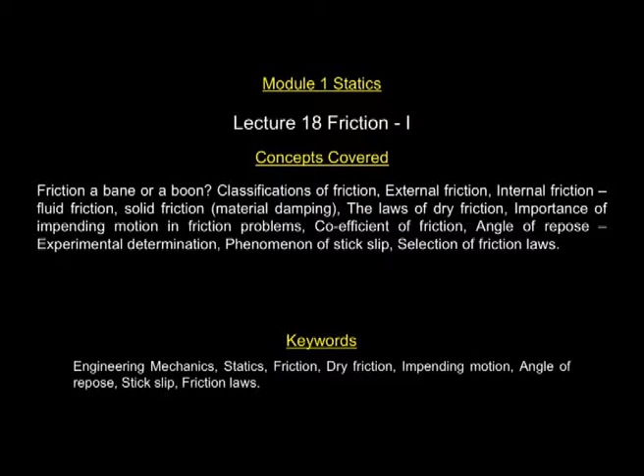Let us move on to our next chapter on friction. In common usage of the word, even in relationships, when we say there is friction, we use it in a negative connotation, not a positive one. But if you ask whether friction is a bane or a boon, you find friction is needed in certain applications.

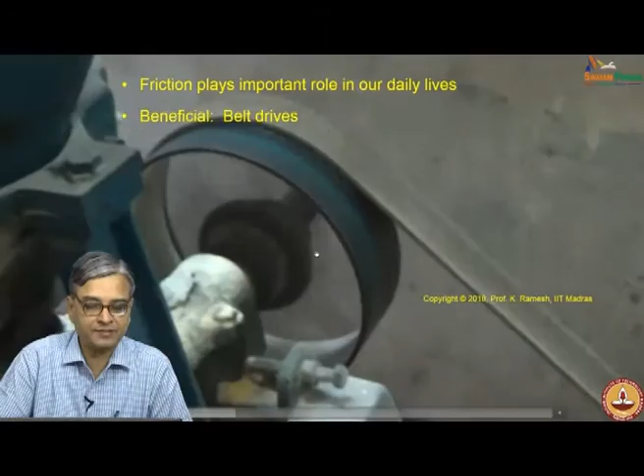And if you go to your simple atta chakki, this is driven by belt drives, and these belt drives employ friction. So, in such applications, friction is beneficial.

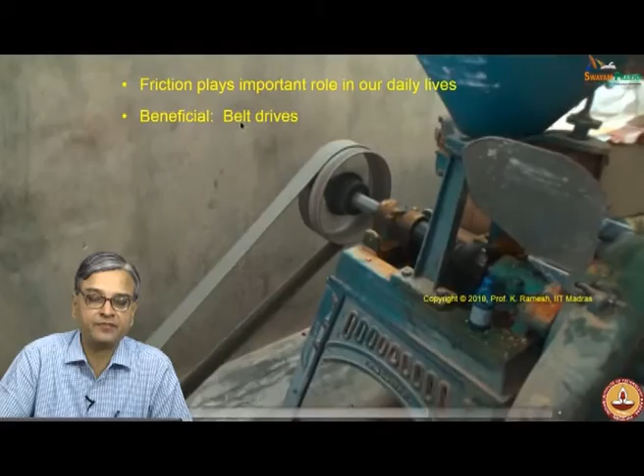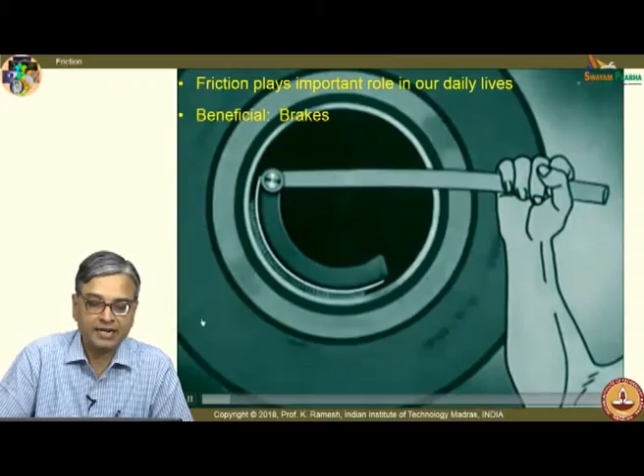Friction is also beneficial in another application that deals with the braking system. When you apply the brake, because of friction, the wheel comes to a stop. So, there are many applications where friction is needed for our own good.

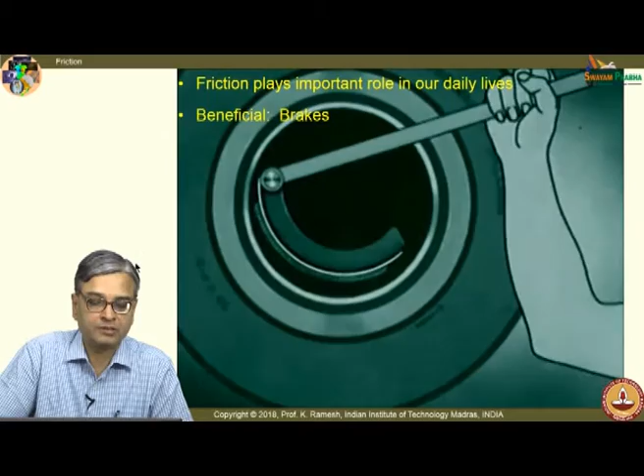There are also many other situations where friction is undesirable. Lots of money is spent on lubrication. This is the IC engine used in automobiles, and you have millions of automobiles. They all use oil to minimize the friction between the cylinder and the piston.

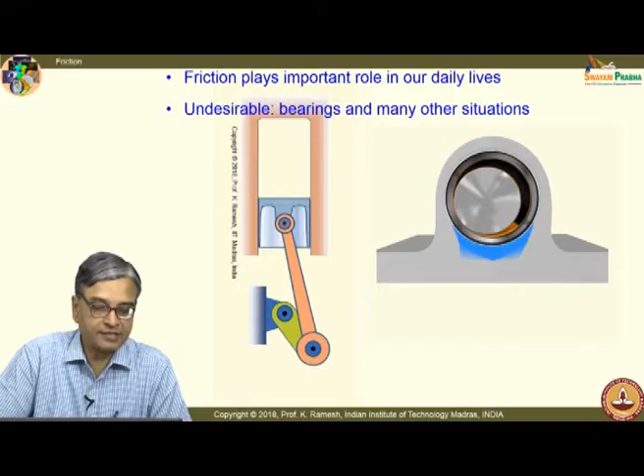You also have several applications of journal bearings, where oil separates metal to metal contact between the shaft and the bearing. If you go and see a machine in the workshop, you would see lots of oil used to lubricate the systems involved.

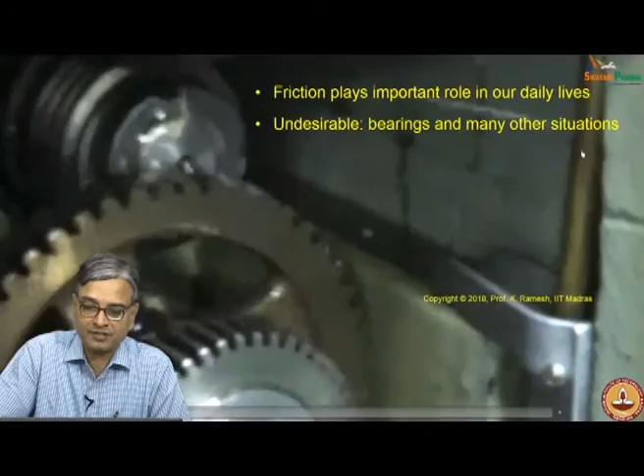Here you also have a system where oil is pumped like this, and you have a worm and worm wheel. That assembly is literally flooded with oil to remove the frictional effects.

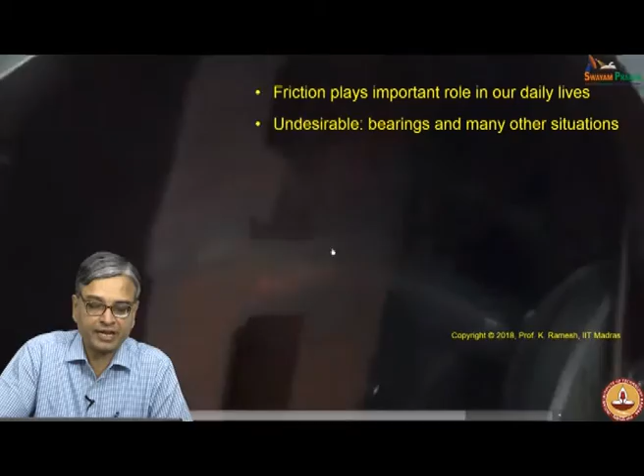This is one example. You also have another example, the quick return mechanism of a shaper. It is literally in oil, a pool of oil here. We will also have an occasion to solve this quick return mechanism when we see dynamics.

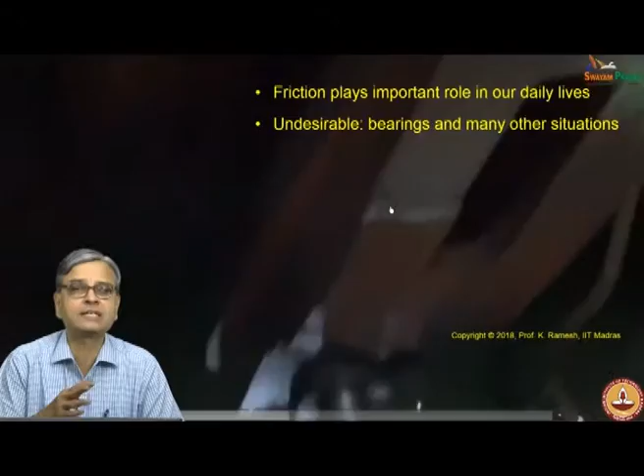So, in all these applications you find you need to minimize the effect of friction. You achieve this by having a medium of oil to solve your frictional issues.

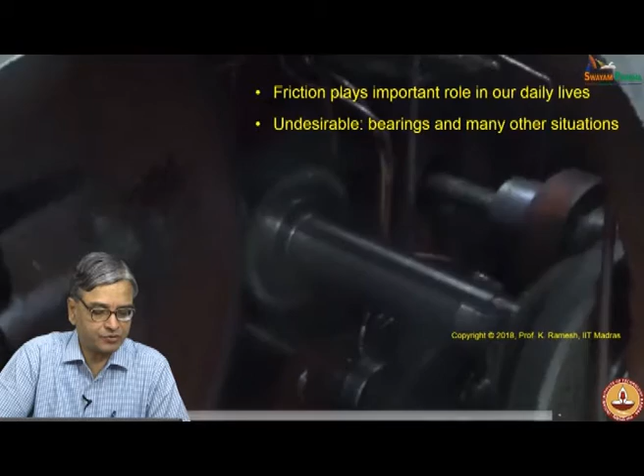We have also seen earlier when we studied support conditions, when I have a pin joint, it restrains translation in two directions, and you have two reactions, the force is unknown and the direction is unknown. So, you have essentially two unknowns.

We also saw frictionless thin bearings. Here again, the direction as well as the magnitude are not known, you have two unknowns.

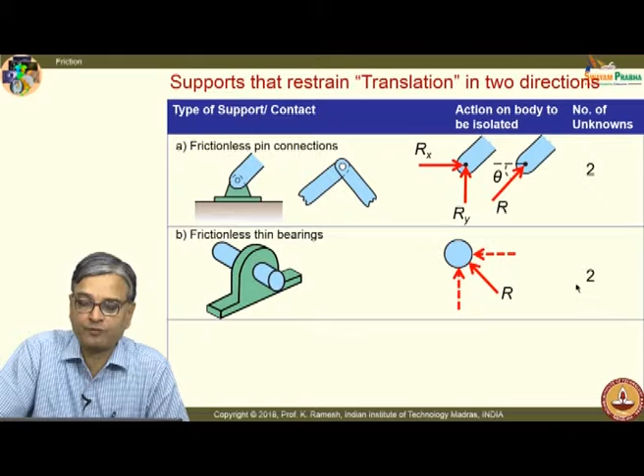Extending this, in the case of rough surfaces in contact, the rough surfaces are shown highly exaggerated. You have two forces, a normal force and a frictional force.

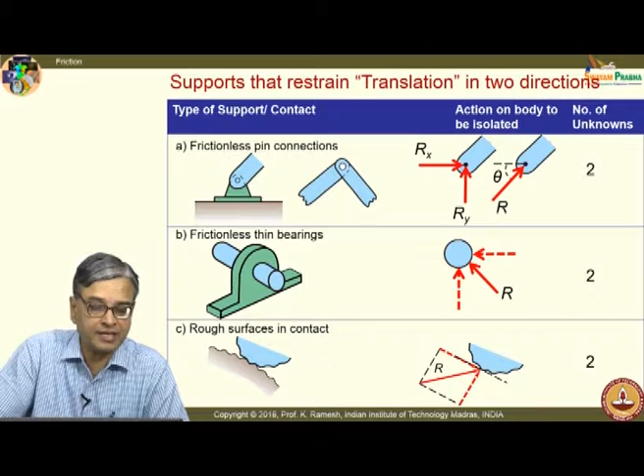In all problems dealing with friction, one of the challenges is to find out the actual direction of the frictional force. From the laws of dry friction, when the motion is impending, it is possible to write the frictional force from the equations of friction. In all other cases, you will have to determine these forces only based on the free body diagram of the component under consideration, which we will emphasize and see later also.

What are the classifications of friction? It can be broadly classified as external and internal. In external friction, I will have static friction, I will also have dynamic friction. And in internal friction, I have fluid friction as well as solid friction.

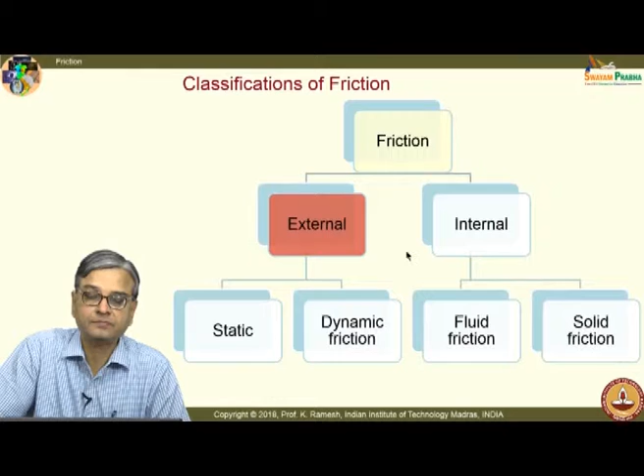What do you call external friction? The interaction between surfaces of two solid bodies in contact. This can be static friction or dynamic friction. In static friction, the surfaces are at rest, but there is a tendency for relative motion. Only when there is a tendency for relative motion do frictional forces come into play. Until then, frictional forces do not come into play.

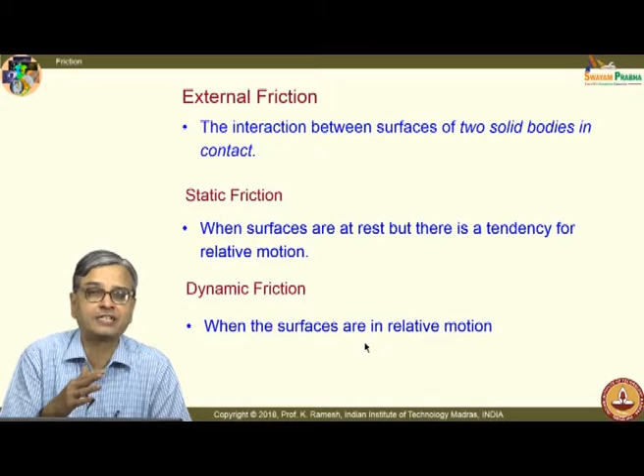And in dynamic friction, the surfaces are in relative motion. In earlier books, you would also find a term called kinetic friction. The current practice is to do away with kinetic friction and embody all that was discussed under the ambit of kinetic friction as dynamic friction. That is a new terminology that is accepted.

And before we get into the details of external friction, let us have some brief discussion on fluid friction as well as solid friction.

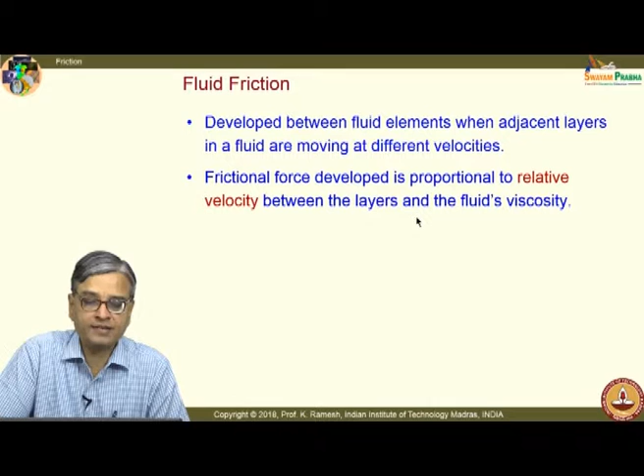This is developed between fluid elements when adjacent layers in a fluid are moving at different velocities. This is possible only when the metal to metal contact is completely separated by lubricating oil. What is interesting here is the frictional force developed is proportional to the relative velocity between the layers and the fluid's viscosity.

It is also interesting to note, in your physics course, you are already exposed to certain aspects of friction, and you might have heard that frictional force is proportional to the normal reaction. From Newton's second law, force is related to the acceleration. So in the case of dry friction, the frictional force is directly proportional to the acceleration. In the case of fluid friction, it is proportional to the relative velocity, and we would see later that in the case of solid friction, the frictional force is related to displacement.

This is very, very interesting. Fluid friction is useful in problems of flow through pipes, orifices, bodies immersed in fluids, lubricated surfaces, and so on. This is also called viscous friction.

Fluid friction appears as a frictional drag, which is seen in the design of automobiles, and India is also going in for a high speed train. If you look at the streamlined body contour of the engine, this is essentially done to minimize the frictional drag.

Also in the case of sports, if you look at cycling in the Olympics, the participants are competing with each other and can have an edge over the competitor if he or she wears appropriate clothing. The dress is designed based on frictional aspects, and if they reduce the frictional drag, they may gain an edge of the order of 0.01 seconds compared to the competitors.

Another interesting aspect is, in the case of vibration studies, you use damping as viscous damping, and this is also used in aerodynamics as frictional drag, and in vibration studies as viscous damping.

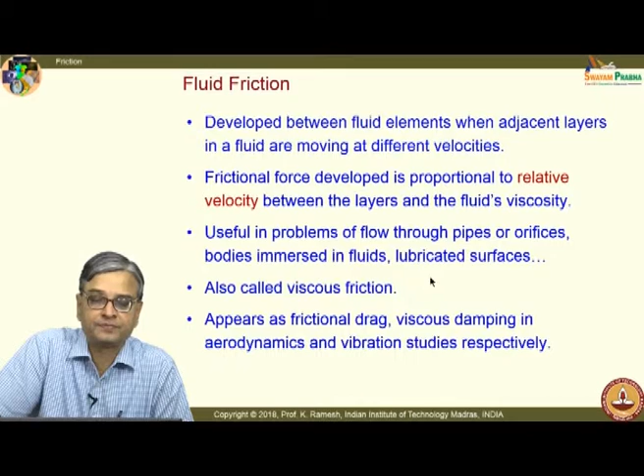This is what you see here in the vibration study. I have a spring and dashpot, and the dashpot has a viscous fluid, and you find the amplitudes reduce rapidly because of the viscous damper. And this is the case of a shaft running in a journal bearing, completely separated by a fluid film.

This develops a maximum pressure slightly to the left. This is where it develops the maximum pressure. There is no metal to metal contact, fluid completely separates it. In such a case, in well lubricated applications, you have to employ only fluid friction for analysis.

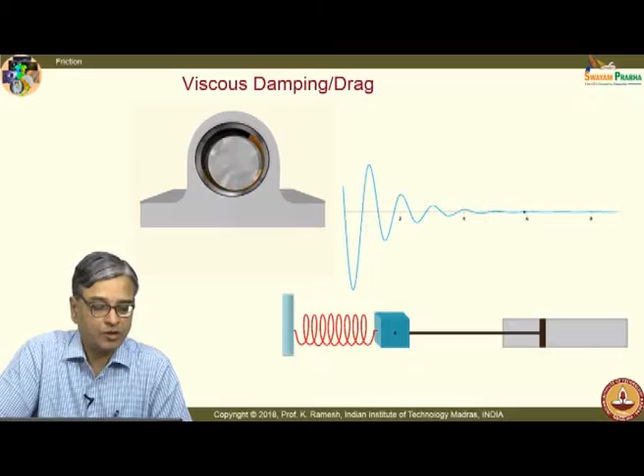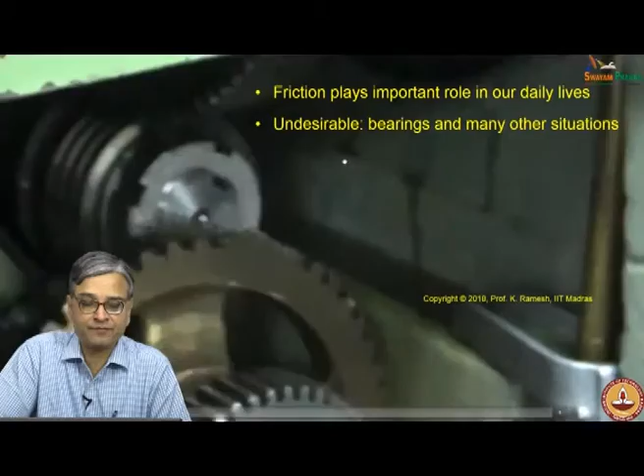That is what is again seen here. The lubricating oil is pumped onto this. You find this is the contact point where you have a flood of viscous oil. So this has to be analyzed based on fluid friction.

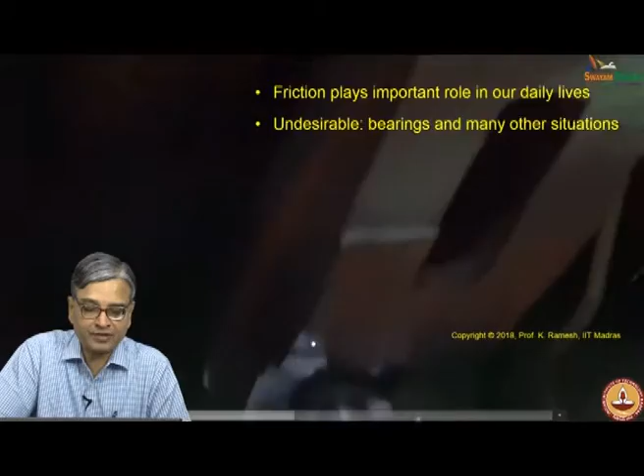You also have the other application. This is the quick return mechanism of a shaper. This is almost in a bath of oil. In fact, it is a very big subject by itself.

Tribology is the name of the subject, and you have engineers who are trained how to circulate the viscous oil to all the components in the engine, and with space applications, how to handle microgravity. Zero gravity applications is also becoming very important. You also have journals that deal with wear. So it is not a trivial aspect. One has to handle friction very, very carefully.

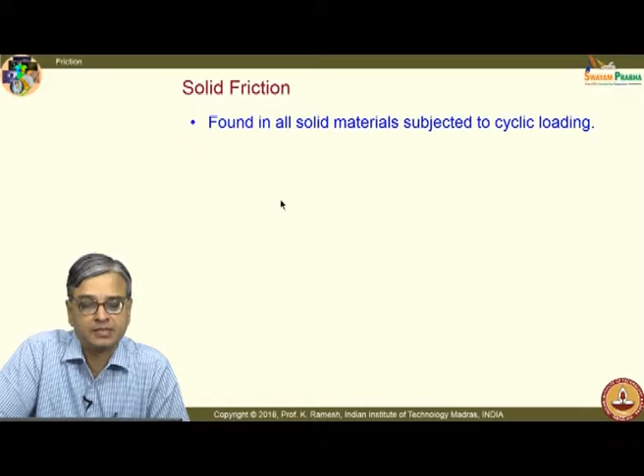It is also surprising, when solid materials are subjected to cyclic loading, one comes across the impact of solid friction. Energy is dissipated internally within the material. That is why it comes under the category of internal friction.

For example, if you put an oscillating spring in vacuum, it comes to rest on its own. The moment you put it in vacuum, you make sure that there is no frictional drag because of the surrounding air, so that is eliminated. When there is no retarding effect visibly, you would imagine if you disturb the spring, it would continue forever. It does not happen. Even in vacuum, this spring comes to rest.

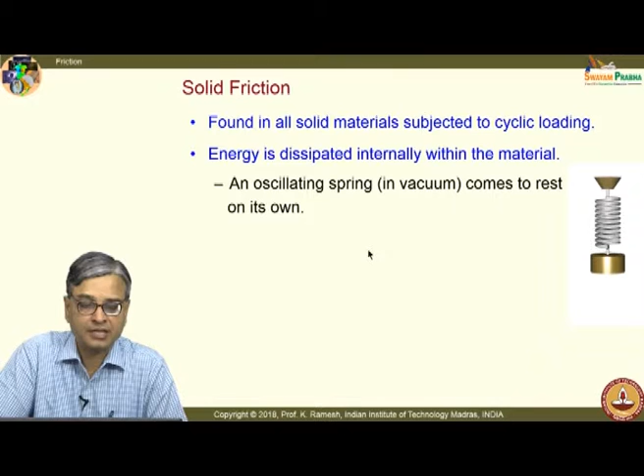The energy dissipated per cycle is independent of the frequency over a wide range of frequencies, and is proportional to the square of the amplitude of vibration. So it is interesting to note, frictional force is proportional to the displacement, as I mentioned earlier. In one case, frictional force is proportional to displacement. In another case, it is proportional to relative velocity. In the case you normally come across, the frictional force is proportional to the normal reaction. So you have all three possibilities, and this spring comes to rest after a long period of time.

In vibration problems, material damping is usually included as equivalent viscous or Coulomb friction. Either it is related in terms of fluid friction, or in terms of dry friction, to simplify the analysis. Even in friction, experiments have played a very important role in understanding the concepts.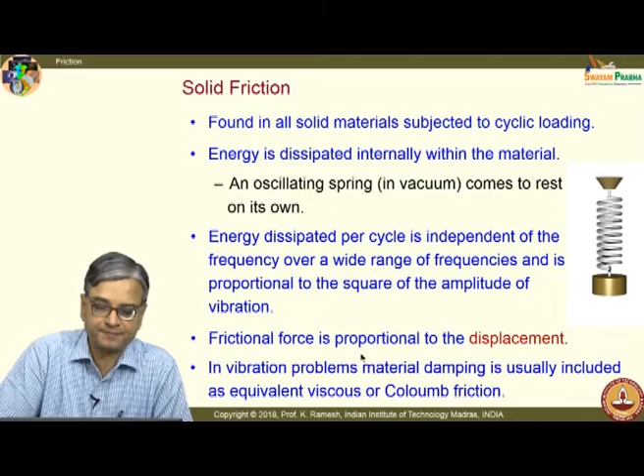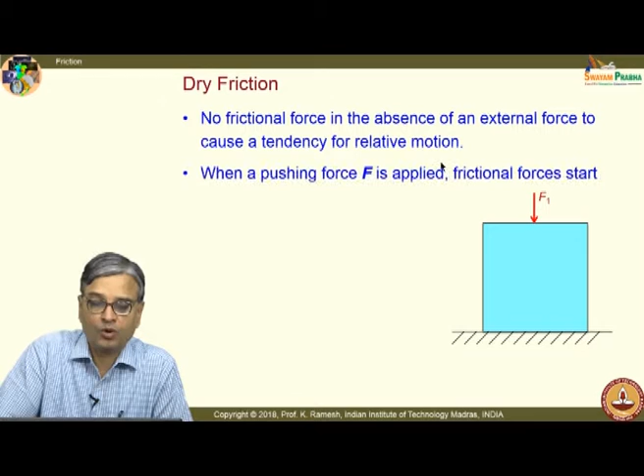Let us get on to dry friction. Suppose I have a block and I have a force F1 acting on it. Are frictional forces developed? Frictional forces are not developed. In the absence of an external force to cause a tendency for relative motion, no frictional forces are developed. Only when a force tries to dislodge it, when there is a relative motion possible between these two surfaces, you have frictional forces developed.

And frictional forces are developed, and the object continues to remain at rest until the force applied reaches a threshold value. This is a common experience. I have a table in front of me. Suppose I want to push this table. Common experience is you go and try to push it. After you apply sufficient amount of force, suddenly you find the table picks up an acceleration, and it also becomes easier for you to push it further.

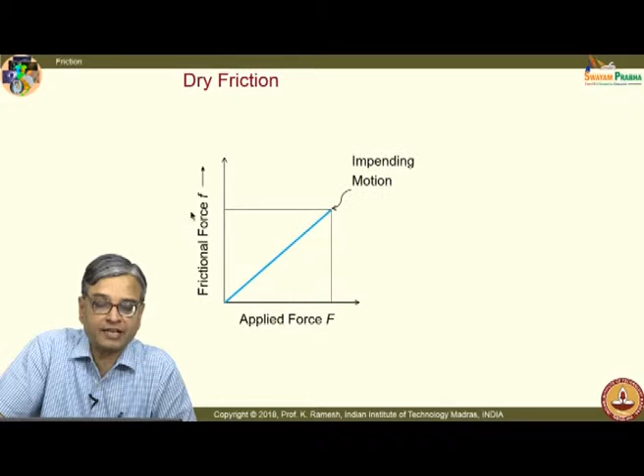And when the applied force F reaches the maximum frictional force, the object will be on the verge of sliding, and this is what is put in the graph. It is plotted between applied force and the frictional force. It remains linear: as the applied force is increased, frictional force is also increased. It cannot indefinitely increase - it reaches a maximum value dictated by the frictional coefficient between the surfaces, and this happens when the motion is impending. That means, if the force is slightly increased further, the block or the object will tend to move.

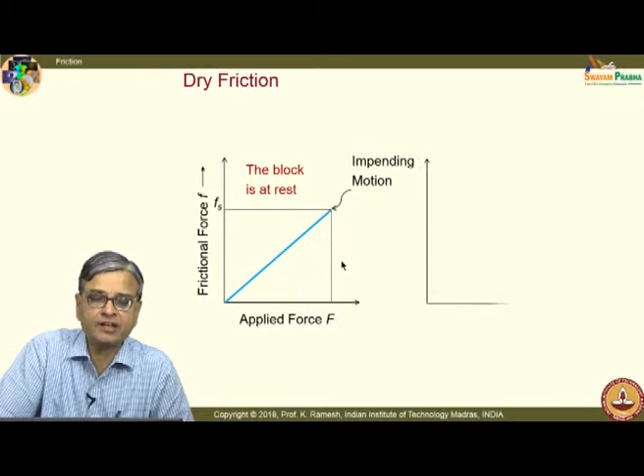Under this situation, the block is at rest. Suppose I increase the force further, relative motion starts, dynamic friction comes into play, and frictional force is reduced. This is a common experience - if you have to push a table, you find at some point you have reached the maximum force, then the table, whichever you are trying to push, picks up an acceleration. Why does it pick up an acceleration? There is a drop in the force that is documented in the form of a graph like this. There is a reduction, then after that it remains constant.

It is also an idealization - frictional force is independent of relative velocity up to a limit. Beyond that, there are changes. It drops down, and in this situation the block is in motion. It is always desirable that you plot these as two separate graphs, as shown in this slide, because the first graph is between applied force and frictional force, and the second graph is between relative velocity between contacting surfaces and frictional force. Many books simply combine these two into one graph, which is strictly not correct.

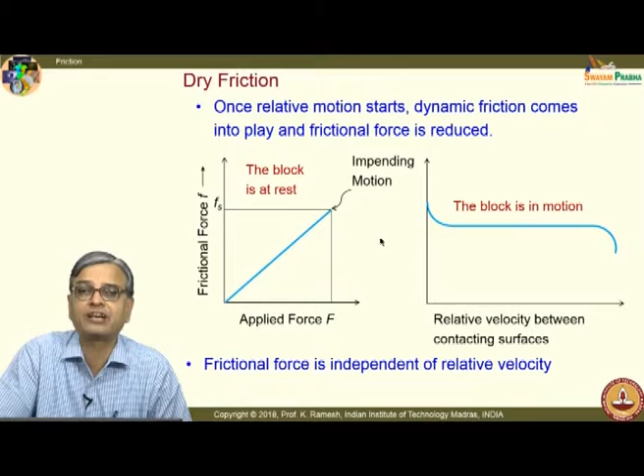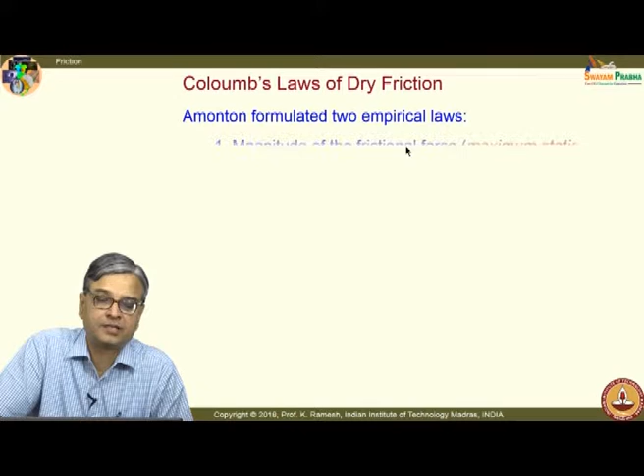What are Coulomb's laws of dry friction? Though they are attributed to the scientist Coulomb, the first two laws were formulated by another scientist called Amonton, and these are based on experimental observations - they are empirical laws. The law states the magnitude of the frictional force is directly proportional to the normal load between the surfaces for a given pair of materials. What you need to understand is the coefficient of friction is always given for a pair of materials, not for one single material. Between the two materials, what is the coefficient of friction? And what is said here, magnitude of the frictional force, means the maximum static frictional force.

And the second law is: this maximum static frictional force is independent of the area of the contacting surfaces, known as the apparent area, for a given normal load. It is a very subtle point, because normally when you bring in your intuition, if you have a larger object with a larger surface, you may think it would offer larger resistance because of friction. This is not so.

We will also see some of the details as we go by. To these two laws, Coulomb added a third law. The magnitude of the frictional force, when we say this, we always mean the maximum static frictional force when the object is at rest. When the object is moving, kinetic or dynamic frictional force is independent of sliding velocity. This is an experimental observation. We also have situations where this is violated, and we'll see what happens in such a case.

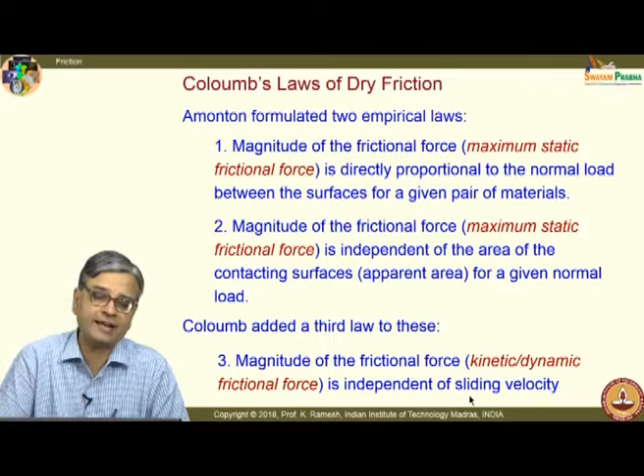The first law may be expressed simply as the frictional force is less than or equal to mu s into n. Please note down this mathematical inequality. Normally people write this as equal to mu s into n, but you should recognize how frictional forces are developed. In the initial stages, the frictional forces are dictated by the conditions of equilibrium, and it reaches a threshold value when the motion is impending. Only when impending motion takes place do we have F equal to mu s into n.

This is the coefficient of static friction, that is why the symbol S is used, and n is the normal load. You should note, when I want to denote this as a force, it is written in italic font. One may confuse this with newtons as a force unit, which is always written in normal font without italics. So see the distinction.

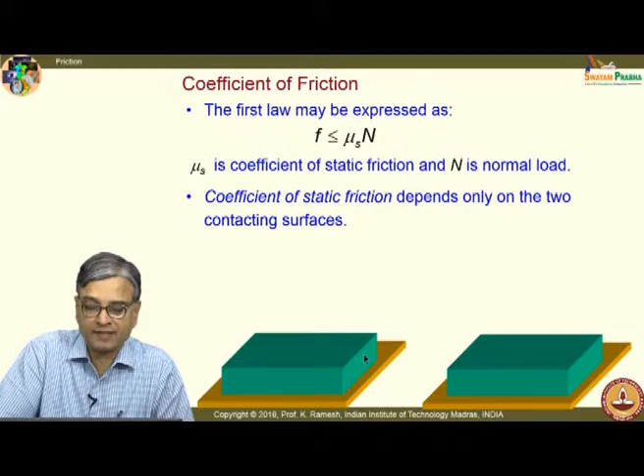It depends only on the two contacting surfaces. I have one surface shown in this color, another surface in this color. Suppose I apply a smaller load here and a larger load here. Experiments reveal that even if the load is varied by a factor of 10 power 6 -- shown by a thin arrow indicating 1 gram of load, and a thick arrow indicating 1 ton, separated by a factor of 10 power 6 -- the coefficient of static friction between the surfaces in both cases remains the same. They do not change, and this is based on experiments.

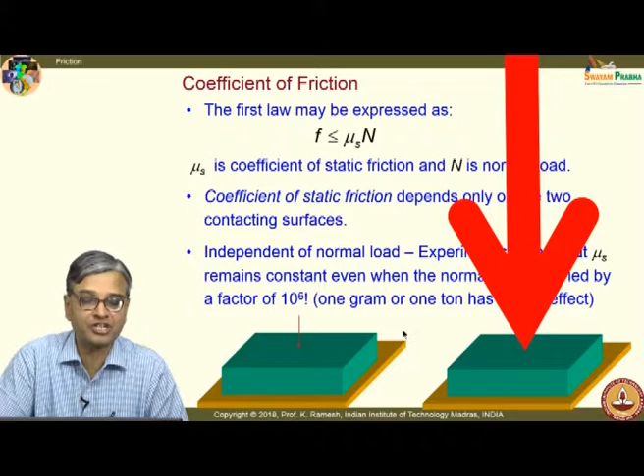Without experiments, one can never appreciate this concept. Intuitively, you may feel more frictional forces would be developed, but the coefficient of static friction remains the same, it does not change. So you will have to make this distinction: mu s is independent of the normal load.

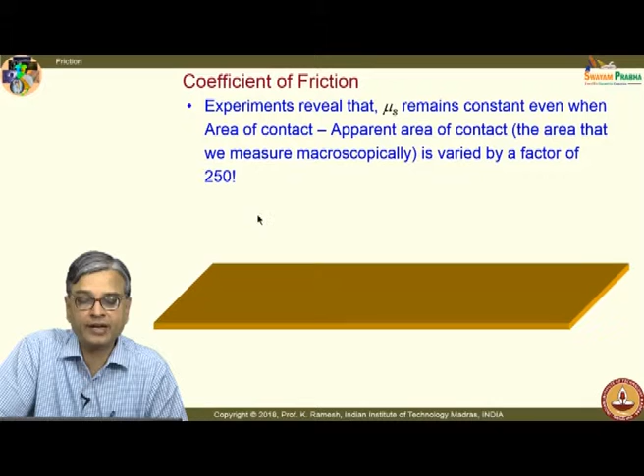Another aspect is that experiments also reveal mu s remains constant even when the area of contact is varied by a factor of 250 times. What we normally see is only an apparent area, the area that we measure macroscopically. I show an example here: I have a surface with an object supported on a knife edge. I apply a force to displace this, and in another situation the block is resting on one of its edges. In a third situation the block is resting on another edge like this. In all three cases, the coefficient of static friction remains the same, it does not change at all.

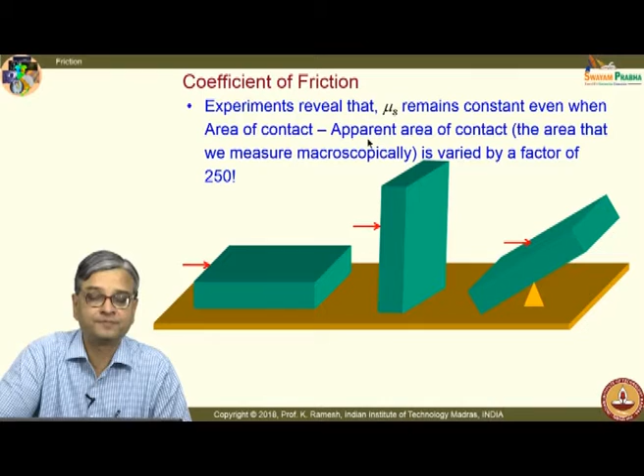The experiments reveal that if the apparent area is increased by 250 times, there is no change observed. For all practical purposes, we can take that this is independent of the area of contact and also the load acting on the object. On similar lines, we also find the coefficient of dynamic friction is nearly independent of sliding velocity.

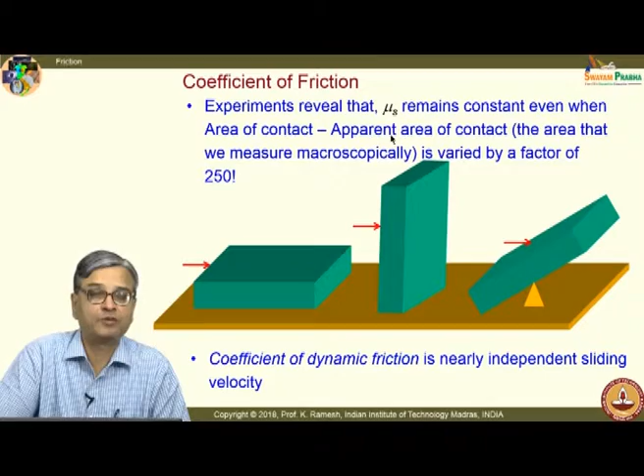What is the best way to find out the coefficient of static friction? We would see a demonstration, and we will also see it through an animation. One of the simplest experimental methods to find the coefficient of friction is the inclined plane. In this, you make the plane of one material, or put the material for which you have to find the frictional coefficient as the base.

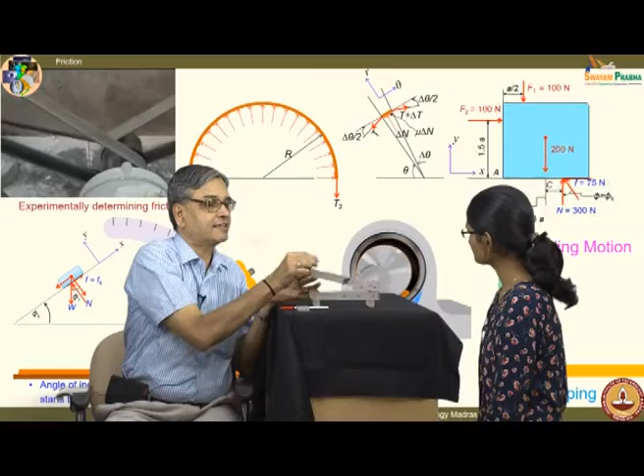Then you have a sample. In this case, I want to find the coefficient for the same material. I have a block made of this, I put it on the plane and slowly increase the orientation to find out at what angle the block slips. What is the angle? 22 degrees. Now, I have the same block. Instead of putting it like this, let me put it this way, so the surface area is less, and this also happens more or less at the similar angle. So this indicates that surface area has no role to play in determining the coefficient of friction.

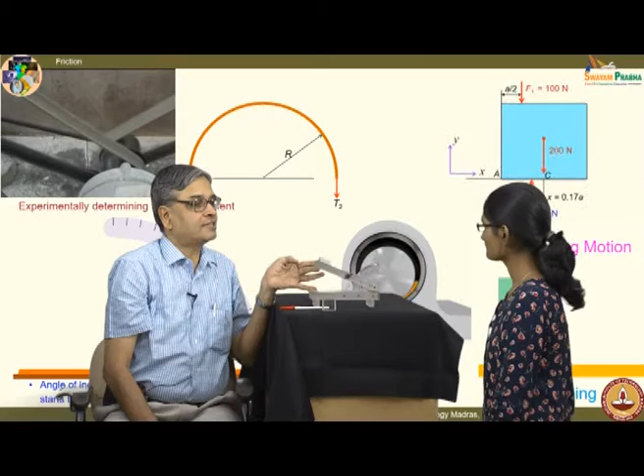And if I have to find out for another material, I have aluminum, I put the aluminum here and slowly raise it, and you have to see at what angle this slips. It slips at this angle. This is happening at an angle of 26 degrees.

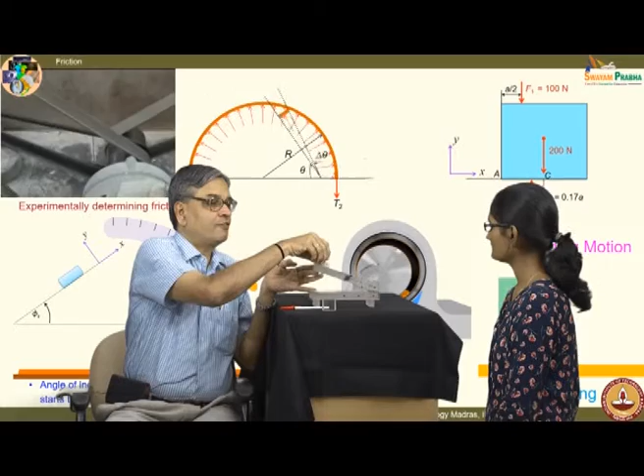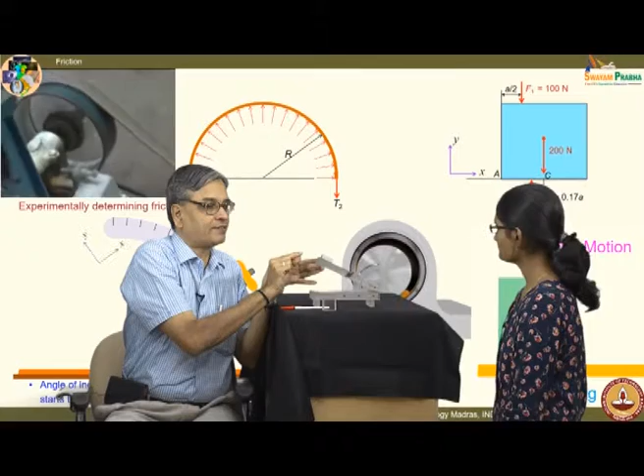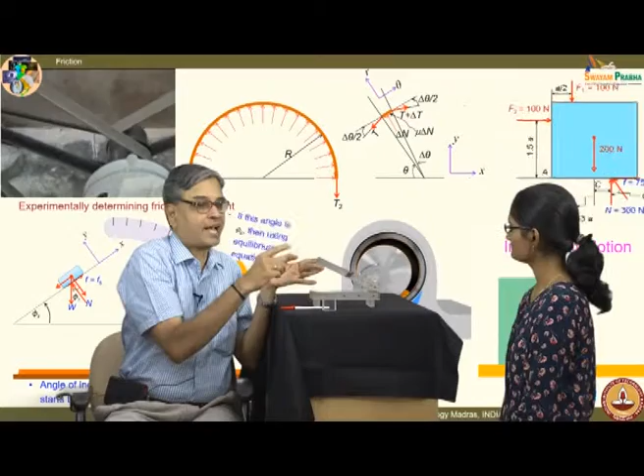What you have to appreciate here is that the motion is impending only at a stage where this is about to slip. If I slightly raise the plank, it will start slipping. So you have to correctly identify that position, and employ that for applying your frictional laws. When I say frictional force is proportional to mu into n, it happens only when the motion is impending.

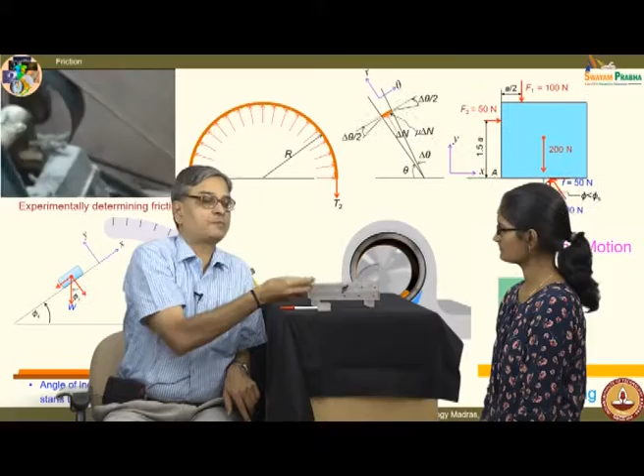That is very important to see. The first case, I have perspex on perspex, the friction is very smooth. I have a smaller angle, that is about 22 degrees, and for aluminum, between aluminum and perspex, it is found to be 26 degrees. So now I have this animation, and you find the block is sliding.

I will repeat this animation again, and what is drawn here is the free body diagram of the block: the weight is acting downwards, friction is opposing the motion, and your normal force is shown slightly displaced. It is a good practice to put it this way.

And from this experiment, if you measure the angle at which the block is about to slide, you call that angle phi s, which is known as the friction angle. Based on the equilibrium equation, this is related to the coefficient of static friction as mu s equal to tan phi s. I will repeat this animation.

The important point I want to show is, if I displace slightly at this stage, the block slides. So you have to understand what is the meaning of impending motion. Only when a slight angle is modified does the block slide; that moment is impending.

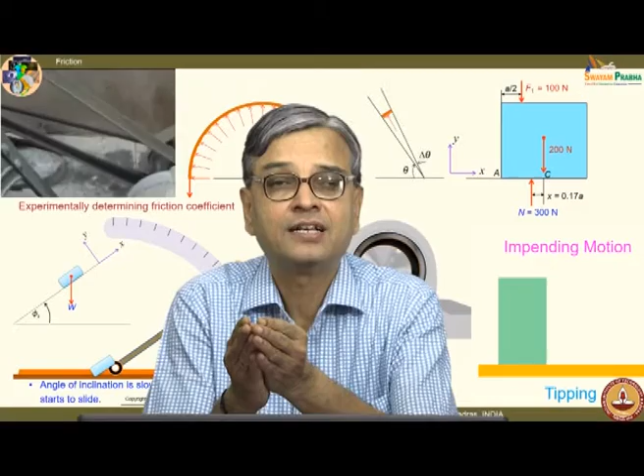In a game of tug of war, when you are pulling the rope, when the rope is about to slide out of your hands, that is the time the motion is impending, and you should know how to identify whether the motion is impending or not. You understand whether the motion is impending only after the actual slipping takes place, but we are talking about a situation where slipping has not taken place, but any slight modification would precipitate sliding of the objects concerned. So that is what is illustrated here.

And when you look at the mathematics, I get the expression mu s equal to tan phi s. This is not dependent on the mass m or the acceleration due to gravity g. It is not a function of these two.

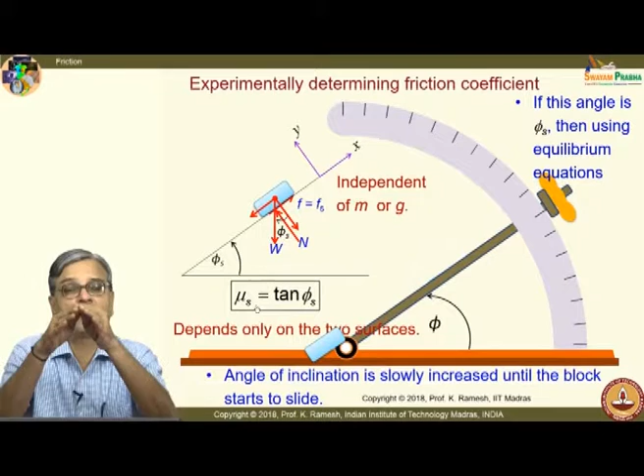And in fact, if you go and see in many places where they store sand or construction materials, or also in places where they have grains in large markets where they put it in a pile, depending on the material, they will automatically form a cone of a particular angle. This is also known as the angle of repose, which is dictated by the friction.

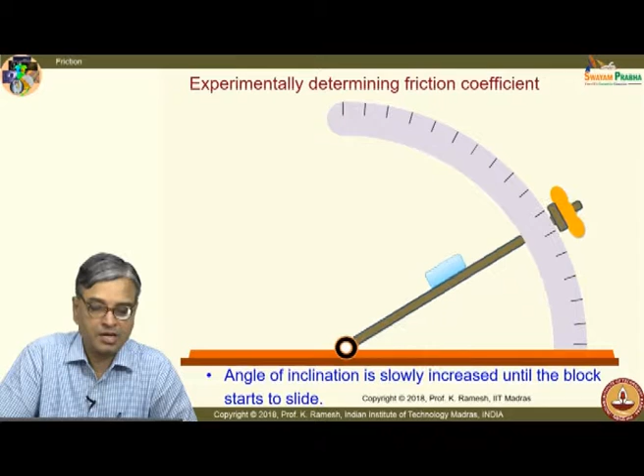And you again see what is the meaning of impending motion. When I slightly change it, the block begins to slide. So the situation just prior to this is the condition for impending motion.

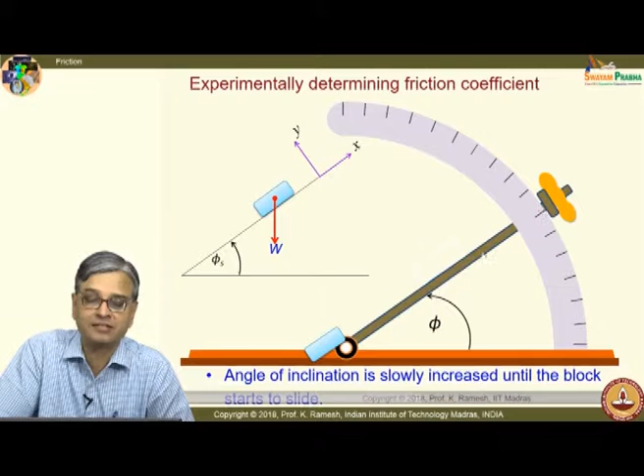What happens at higher relative velocities? When the block is in motion, it is dictated by the coefficient of friction known as dynamic friction, indicated by the symbol mu with a suffix d. At very high sliding speeds, for metal to metal contact, mu d falls with increasing velocity. This is what is observed. What is the consequence of it? This phenomena is observed for poorly lubricated or unlubricated surfaces that may lead to frictional oscillations called stick slip.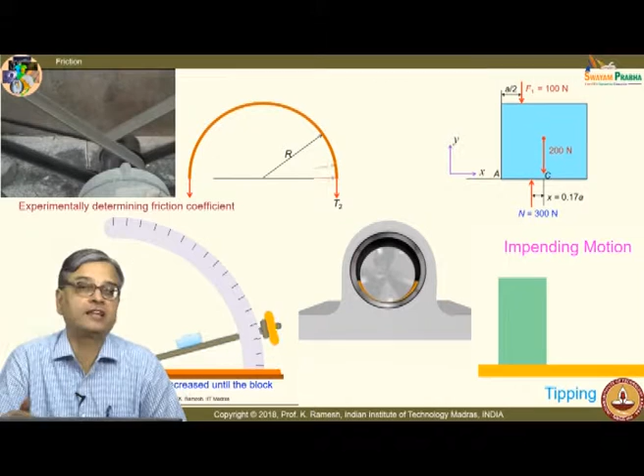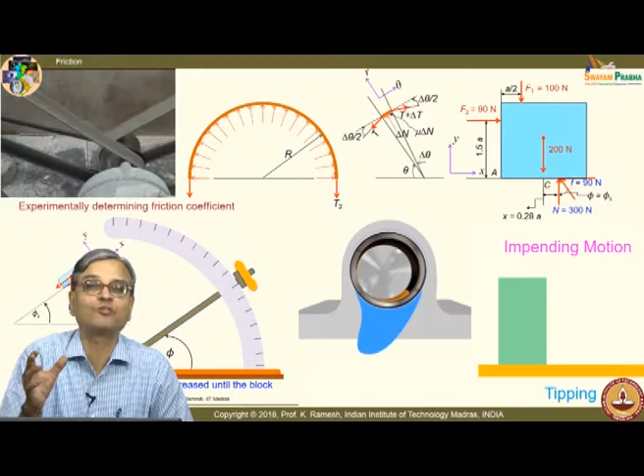In fact, in some movies where they want to show a very eerie condition, at midnight you would enter a bungalow where there will be a door oscillating like this and generating a creaking sound. You feel the situation is very uncomfortable. The creaking sound you hear is mainly because of the phenomena called stick slip. So it is seen even in simple doors if they are poorly lubricated.

And what happens when the objects under consideration are well lubricated?

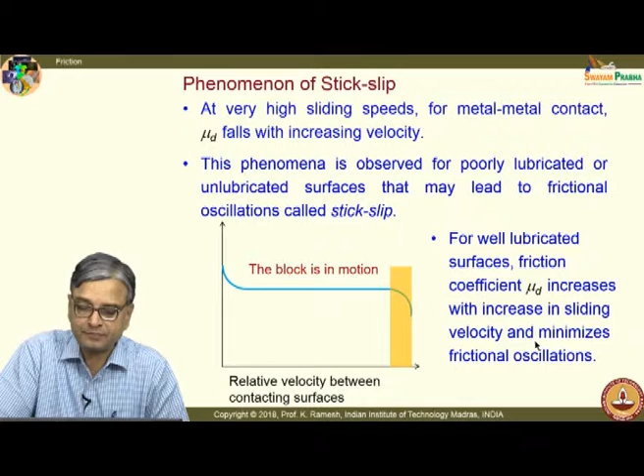Friction coefficient mu d increases with increase in sliding velocity and minimizes the frictional oscillations. So it is always desirable that you should have well lubricated surfaces. Normally that is what you will do. If there is a creaking sound from your door, you take a drop of oil and put it, you essentially lubricate it. You do not even need to study mechanics to do this. You are not comfortable with the sound, so simply put on oil and manage the situation. From a scientific perspective, you have to lubricate it well, so that you can increase the coefficient of dynamic friction and minimize the frictional oscillation.

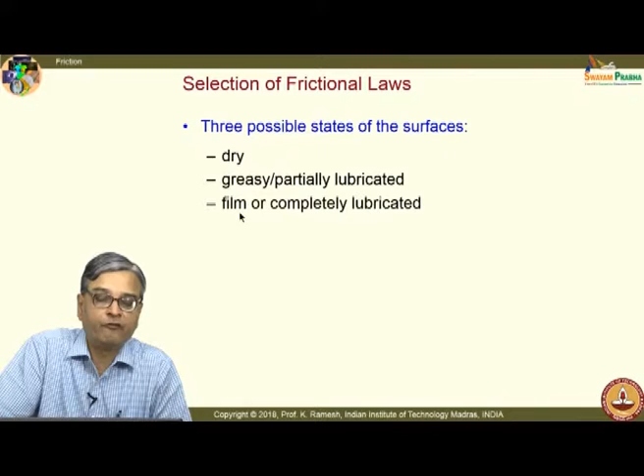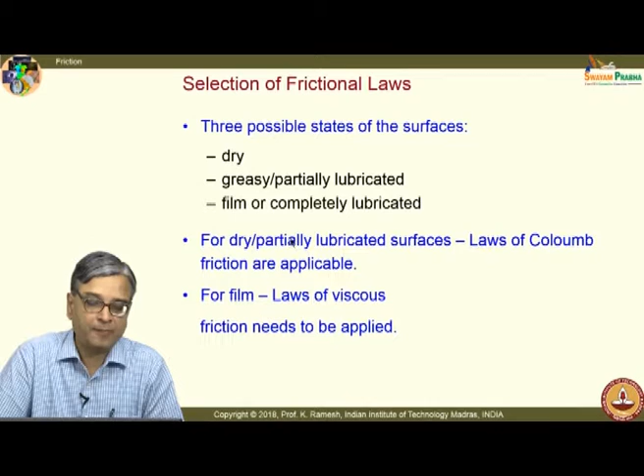How do I select the appropriate frictional laws? Three possible states of the surfaces are identified: one can be dry, greasy or partially lubricated, or film or completely lubricated. For the first two cases, when it is dry or partially lubricated, laws of Coulomb friction are applicable, which makes our life very simple. On the other hand, when a film completely separates the metal to metal contact, even though I do not see it visibly here, there is a film available in between the two. It is very small in thickness with a very high pressure. In such cases, you have to apply laws of viscous friction for the analysis of the problem.

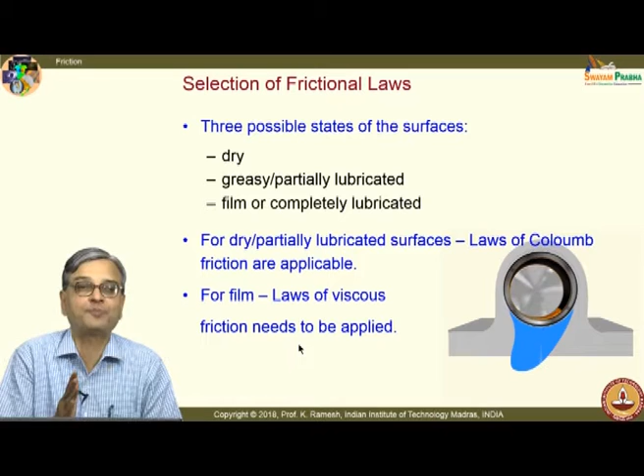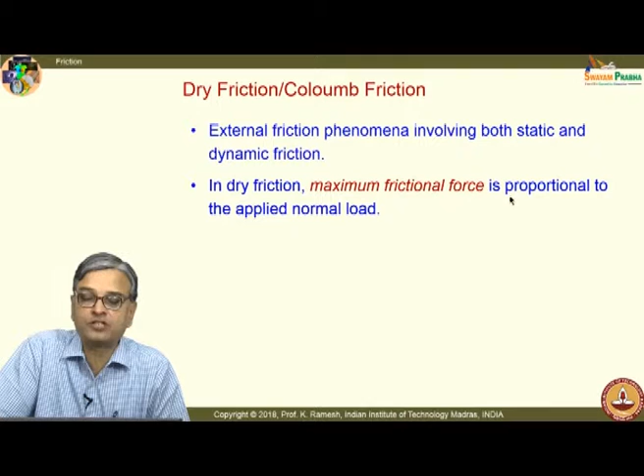So in dry friction or Coulomb friction, it is essentially an external friction phenomena. You have both static and dynamic friction. In dry friction, maximum frictional force is proportional to the applied normal load. This concept is re-emphasized, and this maximum frictional force occurs only when the body is just about to slip. That is a key point to note. For any frictional problem, you cannot simply replace the frictional force as mu times n. Only when you investigate and find out relative motion is possible or motion is impending, then only you can say frictional force equals mu times n.

You will also have to note dynamic frictional force is always less than the maximum frictional force when the body is just about to slip. This is very useful to study wedges and power screws. Power screws are nothing but a wedge wrapped around a cylinder, and you have square threaded screws, which is used in many mechanical engineering applications. Partially lubricated bearings have important applications in brakes, clutches and belt drives. In all these cases, you can apply laws of Coulomb friction and get your parameters calculated.

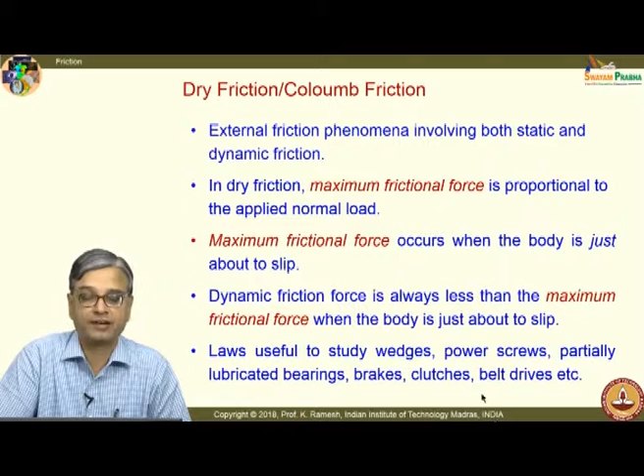It is better that you learn the concepts by solving a simple problem. I have a block of 2a by 2a weighing 200 newtons, and in this case you will have to find out, for different forces F2 starting from 0, 50, 90 and 100 Newton, the condition of the block and also determine the reaction forces. It is given in the problem statement that the coefficient of static friction between the block and the floor is 0.3, and the dynamic coefficient of friction is 0.25. You can note clearly here the mu s is greater than mu d. Please ponder about this problem and we will try to solve it in the next class.

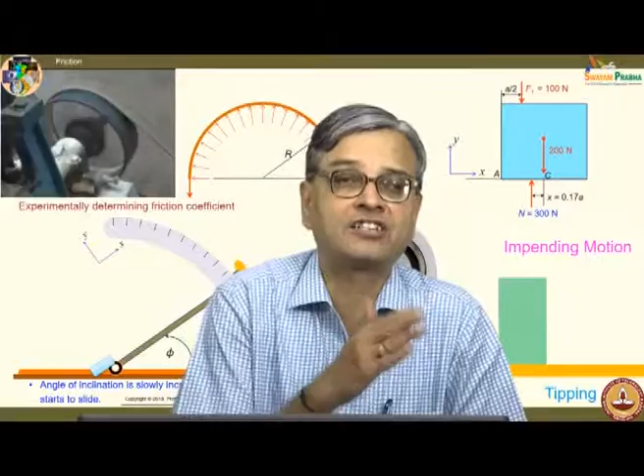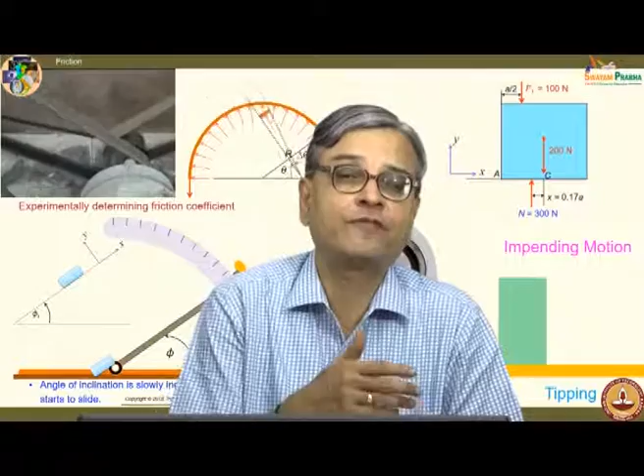In this class we had a brief idea about the classifications of friction. We classified as external and internal friction. In external friction, we further classified as static and dynamic. In internal friction, we looked at fluid friction as well as solid friction. The interesting point I brought into focus was, in one case, frictional force is proportional to displacement - that is what happened in solid friction. In the case of fluid friction, frictional force is proportional to relative velocity. And in the case of dry friction, frictional force is proportional to the normal force.

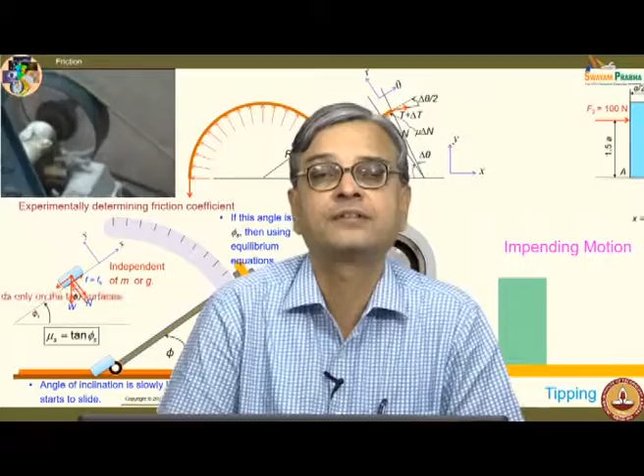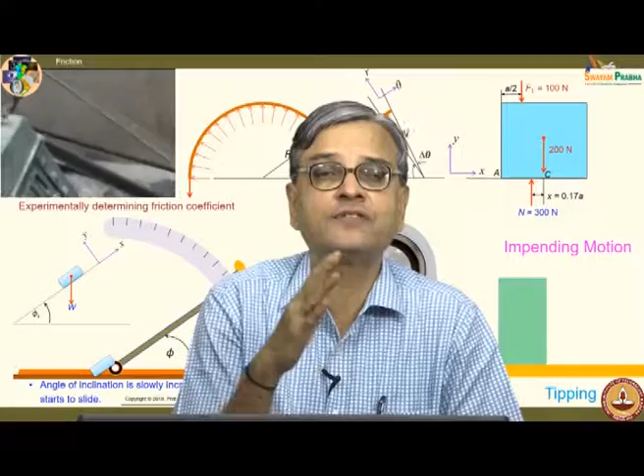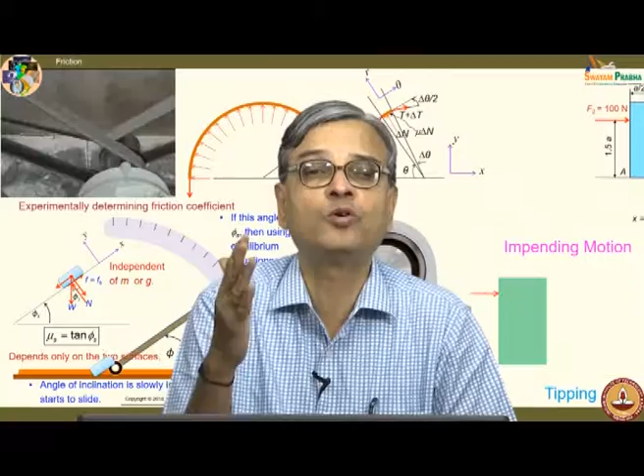I have cautioned, in problems dealing with friction, you should recognize frictional forces develop only when there is tendency for relative motion. Further, in initial stages, the frictional forces are dictated by the equilibrium condition. The frictional forces increase as the external force is increased. It reaches the maximum value when the motion is impending. Only at that condition can you replace the frictional force as mu times the normal force. Thank you.